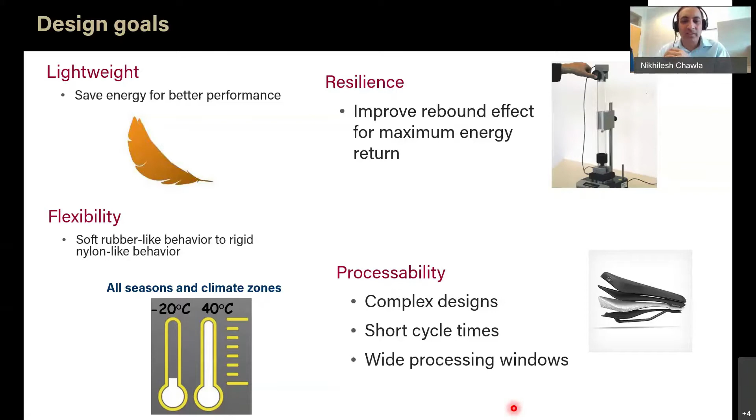And if you go to the websites of Adidas or Nike, you can now actually make your own shoes. You can design your own shoes, and you can get those hopefully in a matter of weeks. I have two boys who play soccer, I'm a soccer coach, and I know that having really funky looking nice cleats with their names and their uniform numbers on the shoes are the rage these days. So that's a big thing.

Let me talk a little bit about the history of high performance foams. This is a slide that's courtesy of Adidas. If you look back at the sort of really older Adidas shoes or even Nike shoes, they looked something like this - they were all nice and white with 3 stripes.

And nowadays you have a variety of different kinds of materials. You have the midsole compound, of course you have the rubber, and then you also have technology that goes into this - things like the miCoach.

This is a little chip that goes into your shoe sole, and if you're a soccer player, for example, it can keep track of how much you've run, your average, how you've struck the soccer ball, and things like that. So there's a lot of data that can be achieved from this.

One of the early sort of proponents for foams in materials is something called Adiprene. Essentially that was one of the early versions, and since then they have moved to something a lot better.

So here's actually a little video comparing the EVA, which was the classic sort of foam material, with the Boost foam, which is really the topic of today's presentation.

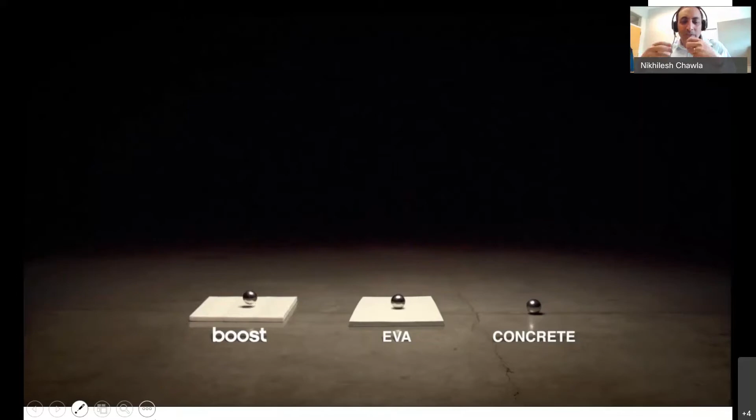We're going to show you a video of just dropping these steel balls on concrete and EVA and Boost. You can see that the ball bouncing on the Boost continues to bounce well after the other balls have stopped. So you can see that Boost in this very simple example gives you a very nice amount of flexibility and rebound to your foot, whether you're running a marathon or walking in your neighborhood. It's going to give you that comfort.

So what is Boost? Boost was actually introduced back, I think, in 2013 or so. It's really a composite, with tiny little holes - a hierarchical, porous foam structure. I'll show you exactly what that structure looks like.

So you have these little beads, and all of these beads are shown in a ball, but essentially these beads are used with a steam chest molding process, and you actually then form this sole of your shoe. It looks kind of cool as well - it looks like you have all these tiny little beads in there, but they're actually all fused together into the plate of this Boost foam.

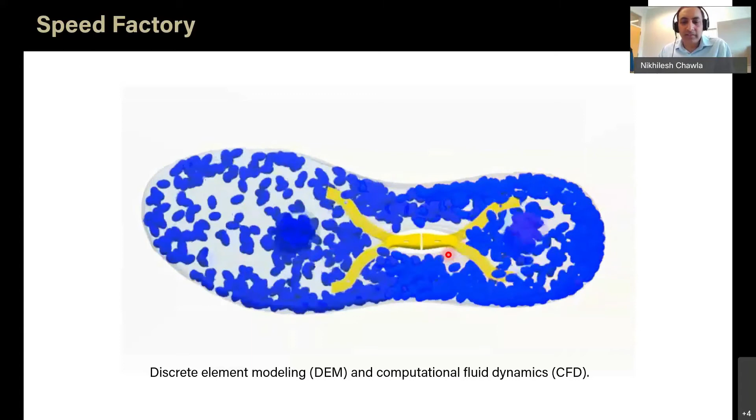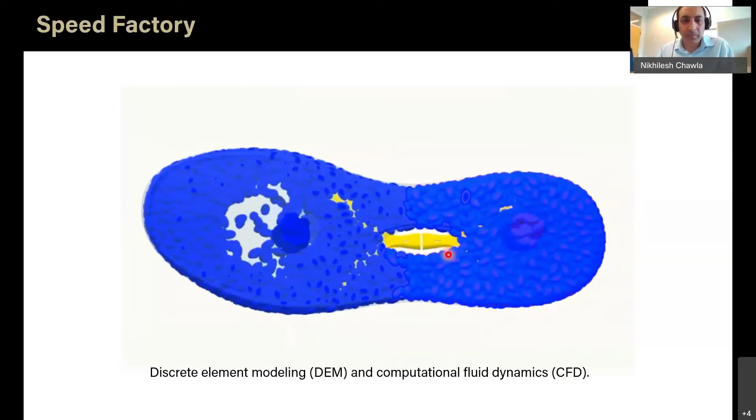This slide actually shows you a discrete element modeling, CFD kind of simulation, showing how these beads are actually flowed into the sole to make the footwear. Essentially they flow all the way through, and then eventually they apply some temperature and some steam, and you get the fusion between these beads.

So in reality, Boost foam is a very unique multi-scale hierarchical foam structure. It essentially has very nice attractive properties - energy absorption, high strength per unit weight. The length scale of this: on a macro scale you have all these beads together, and then we need to look at the individual beads and what the structure of those is. Then we can even go down to the ligament level and the cell level.

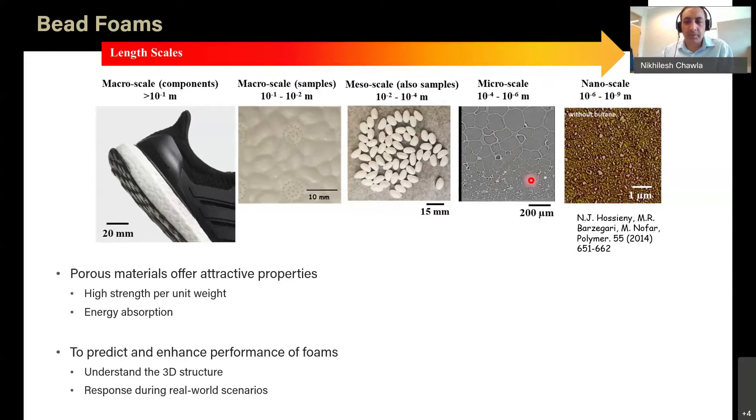Which I'm going to talk about today using techniques like X-ray microtomography. And if you wanted to go even further down to the nanoscale, you could get into the overall polymer chains and the chain structure of this particular polymer. So really the objective when we started this work was - Adidas had come to us and said, we have this really interesting material.

We really don't quite understand the microstructure property relationships in this foam. That was really the guiding force here: how does cell size and morphology affect flexibility and compressibility? How does cell distribution, ligament size, and all these structural effects, how does the 3D structure of the individual beads as well as the overall plate affect mechanical properties?

So we set out to do these in situ experiments to really look at how the overall cell structure is affecting the compressibility and the flexibility of the materials. This was actually done using X-ray microtomography under compression, and I will describe some of those experiments.

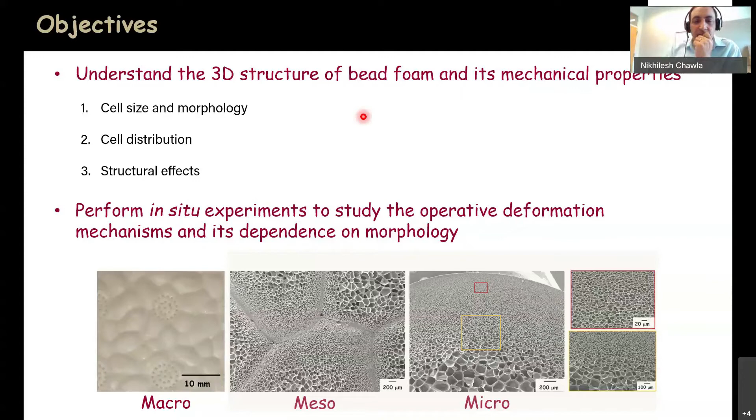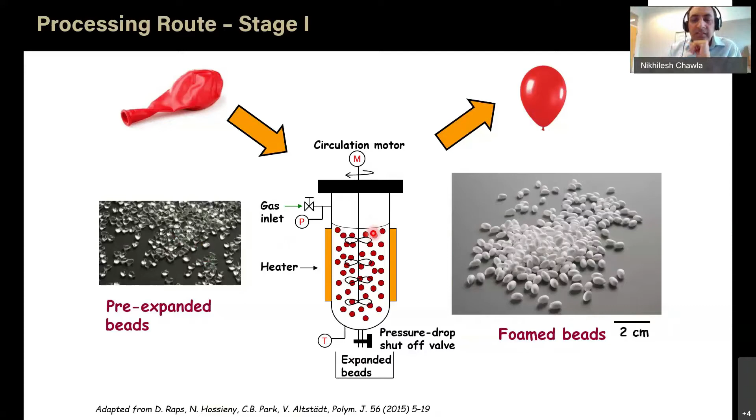So how are these beads made? We have these pre-expanded beads, and essentially these are put into a kind of autoclave, and then you inject this gas, and the pre-expanded beads get foamed. If you think about a balloon that initially has no air, you fill it up with air—so you foam these beads and get this cellular, porous structure.

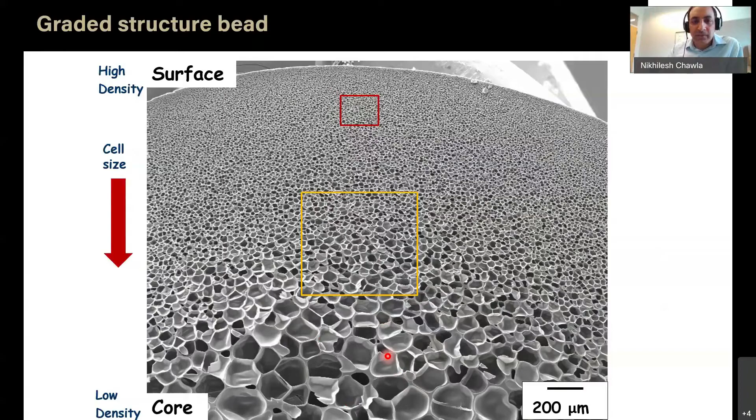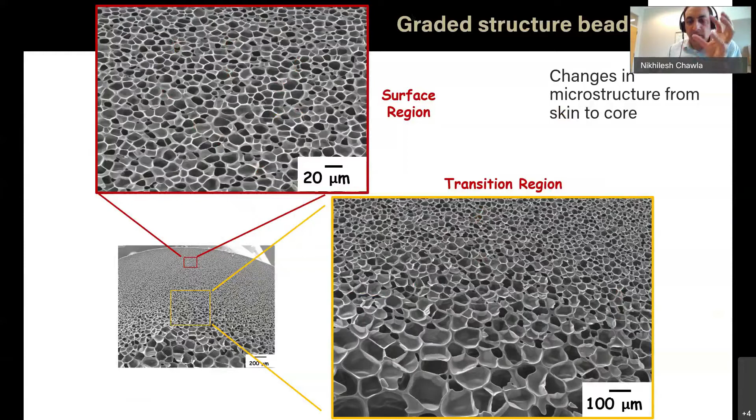So here, on the surface region, you have a much finer cell size distribution, and then a transition region, and in the center and core you can actually see much larger cell size. Okay, so now we can transition a little bit to the overall plate distribution.

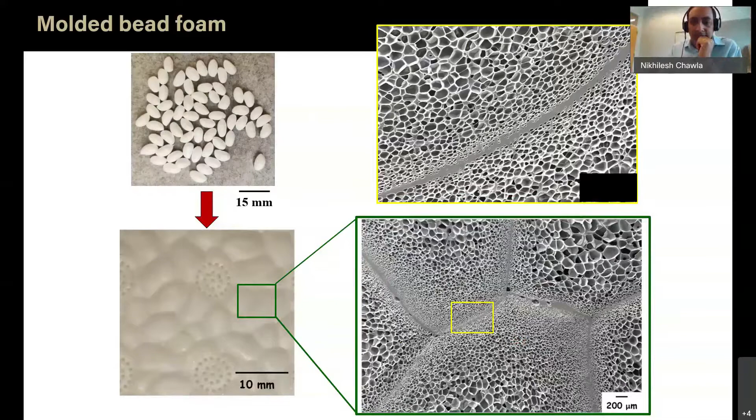So if we start to get these beads together and fuse them—I want to show you these images on a little bit larger scale. Here's a nice image of a cross section of the plate from the shoe beads that have been fused together.

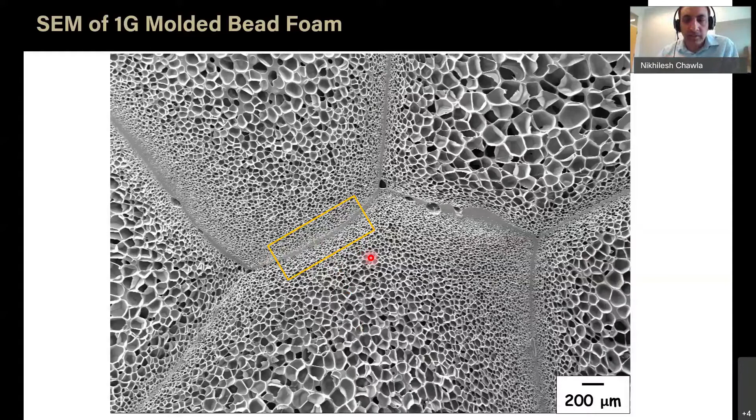And you see this darker gray region where you have very nice bonding, and in some regions a little bit of defects, but overall very nice bonding here. You can see that the graded structure gets, the cell size gets smaller and smaller as we get to the inter-particle or inter-bead boundaries. So you can start to see how the overall packing of the beads is going to affect the load transfer and how the material behaves under compression.

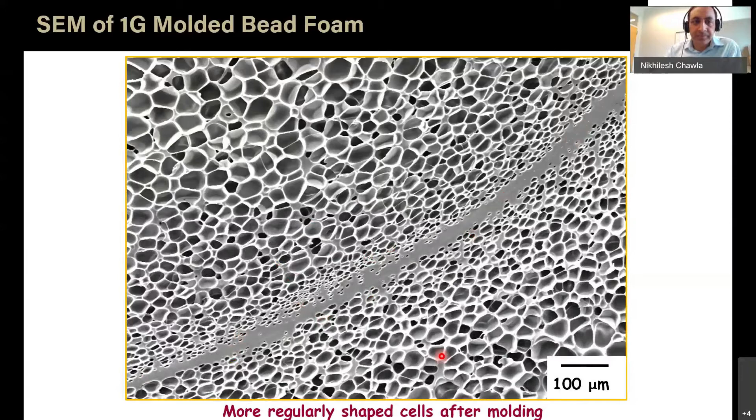Here's another example of that fused region. You have a very nice thin region, which is giving you the adhesion between the beads. In some situations, you do see some delaminated regions, and these, over time, are most likely going to initiate interfacial cracks.

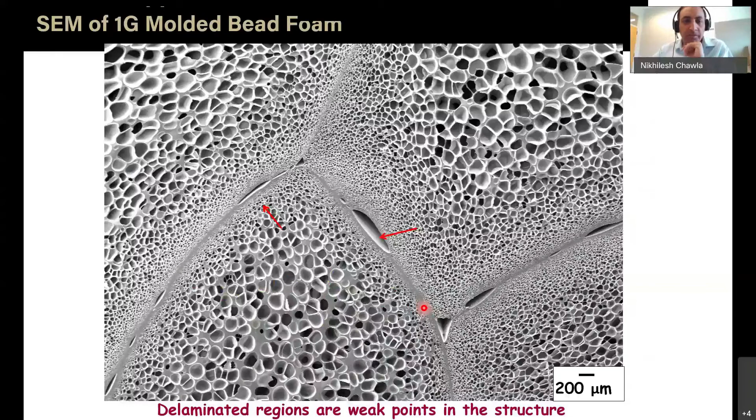So now the question is—what I showed you so far were all sort of cross-section SEM images, destructive images. We wanted to find a way where we could look at the microstructure of the material in 3 dimensions, non-destructively, and we also wanted to be able to apply a stimulus—in this case, the changes in the structure while the material is being compressed.

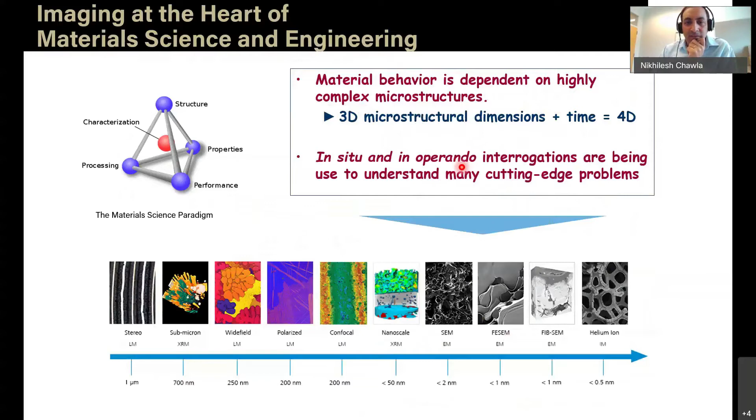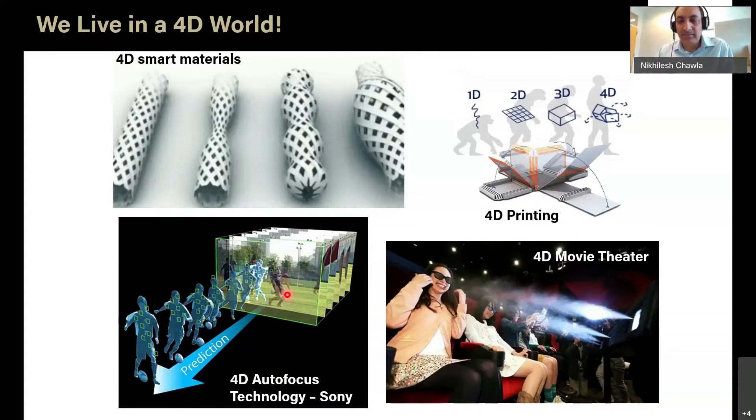I mentioned 4D here, and what it really means is we're looking at the 3D structure, and the 4th D is really time. 4D is not unique just to material science—there's 4D movie theaters, 4D printing, 4D smart materials, and even things like 4D autofocus technology. This is probably most analogous to what we're doing with tomography, because with autofocus, you're actually looking at time-evolved images, and in this case they're using focusing technology to predict what the object is going to do.

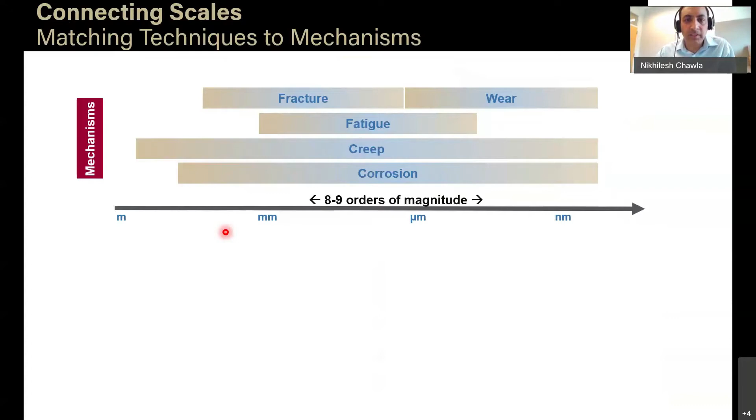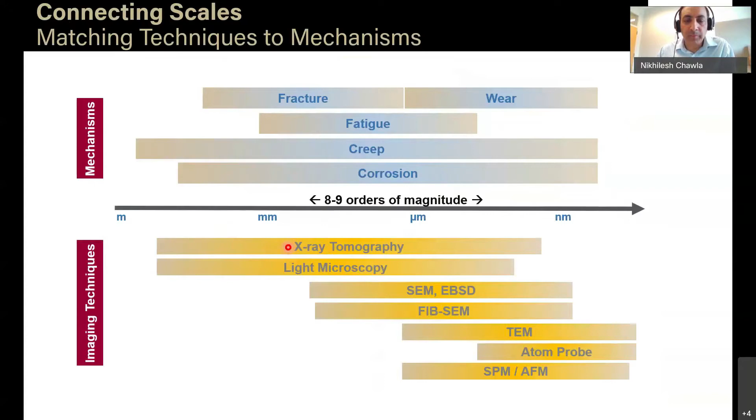So can we match length scales like fracture, fatigue, or creep? These things span multiple length scales, and we can start to link these particular properties to individual imaging techniques. We'll be looking primarily at X-ray microscopy and X-ray microtomography.

We can go all the way from the millimeter to submicron regime. I'll tell you a little about our center, which started at Arizona State University prior to my moving here to Purdue about a year ago. We had a kickoff meeting about 4 years ago, and these are our wonderful sponsors who fund our research.

Here at Purdue, we have X-ray microtomography capability where we can do imaging, and this is a cross-section of the boost foam. For metallic materials, which I'm not talking about today, we can do things like 3D crystallographic, 3D EBSD kind of measurements. We also have capability to do nano indentation all the way up to 800C and down to minus 120C, as well as things in the liquid cell.

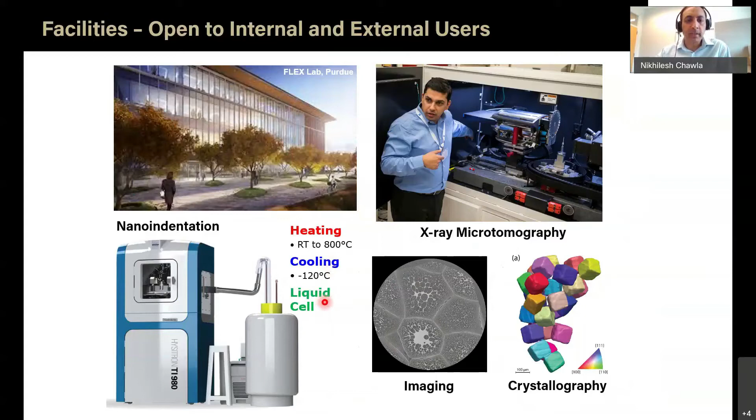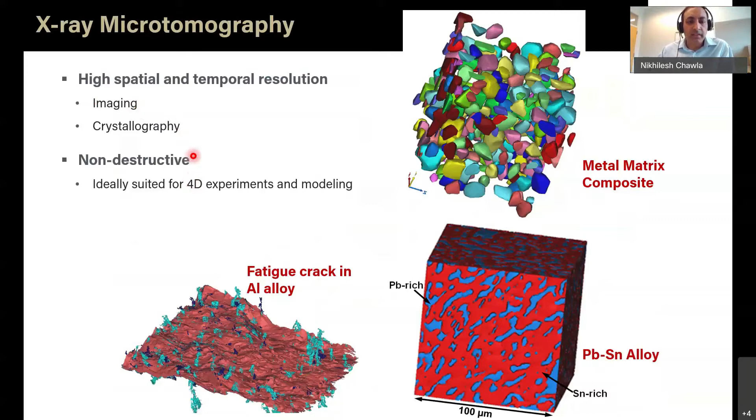Let's talk a little about X-ray microtomography. It's a technique that's been around for 10 or 20 years, primarily used for imaging. But as I mentioned, you can also use it to get 3D crystallographic information, and it's ideally suited, because it's non-destructive, to the kinds of 4D experiments that we wanted to do.

So if we want to do tomography, what does it mean? Let me put a little cartoon here. If we wanted to look at the 3D structure of a light bulb, we would shine some X-rays through that light bulb and get two-dimensional projections. Then we would turn that light bulb at angular increments of 1/8 of a degree or 1 degree, and essentially you'd get a two-dimensional projection at each step.

When you get all of those two-dimensional projections, you can use what's called a filtered back projection algorithm, which is essentially an inverse Fourier transform of that data, and you can get your 3D microstructure.

The data acquisition part and the reconstruction part of this are certainly important, but there are a lot of things we want to do with this data downstream, and that requires a fair amount of image analysis, image segmentation, visualization of these data sets, and statistical quantification to try to actually understand what the mechanisms of deformation are taking place.

That could be, in this case, changes in cell size, changes in ligament size, ligament diameter. In fracture cases, you would be looking at things like crack density and things of that sort.

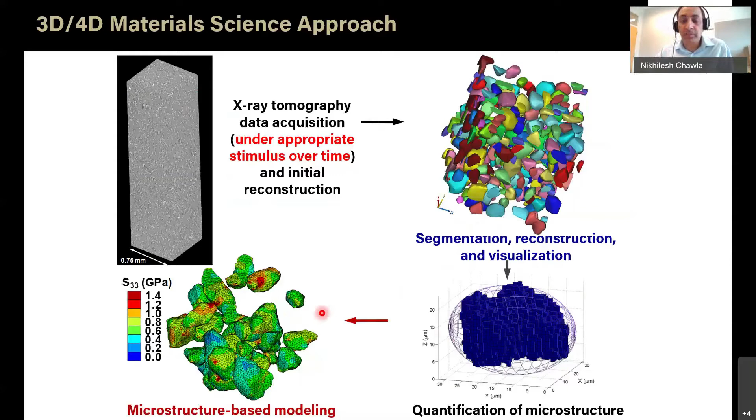The first part of my talk, I want to talk about some experiments we did on in situ compression in the lab—this is a lab scale X-ray source. In the second part, I'm going to talk to you about some experiments also in situ compression, but using a synchrotron source at the Argonne National Laboratory.

There are different reasons for doing the synchrotron experiments. Those experiments are more dynamic.

This is actually an image of the Versa 520. Here at Purdue, we have the Versa 620. You have the X-ray source here, and there are several filters, so it's a polychromatic beam with the X-rays coming in. Your sample is going to be sitting here, and it's going to be rotating, and we're taking projections at each of those angular increments. You can also get some magnification in this part here.

There's a scintillator screen that converts the X-rays to visible light, and then there's a CCD camera that captures the images. Of course this is done with the doors closed—we take safety very, very seriously.

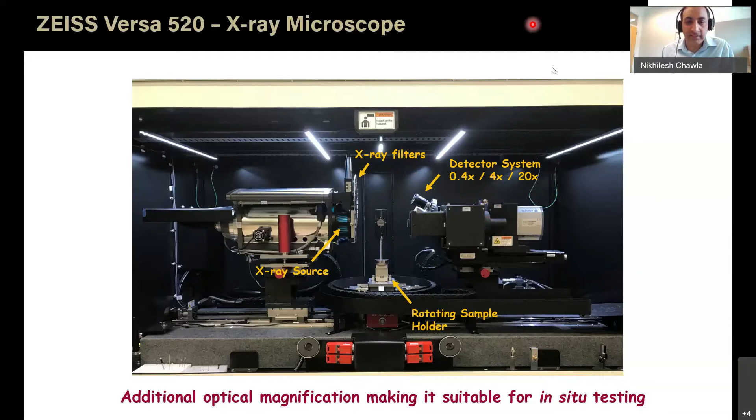So that's the X-ray part, but we need to be able to now compress the foam and be able to keep it at a particular strain.

So Arun actually devised this very neat little in situ loading fixture where your sample goes in here, and you have rotation of these screws that impart a downward displacement. You need to have this PMMA sleeve to give some robustness to the cell.

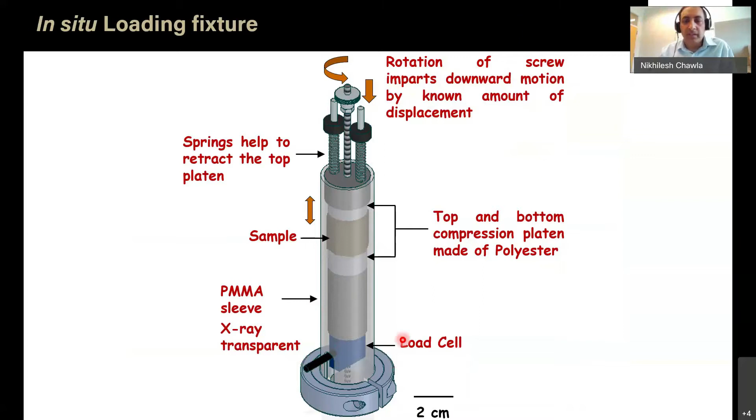That PMMA material is X-ray transparent, and you have a load cell down here. This whole thing is going to have to be able to rotate 180 or even 360 degrees during the X-ray tomography scan.

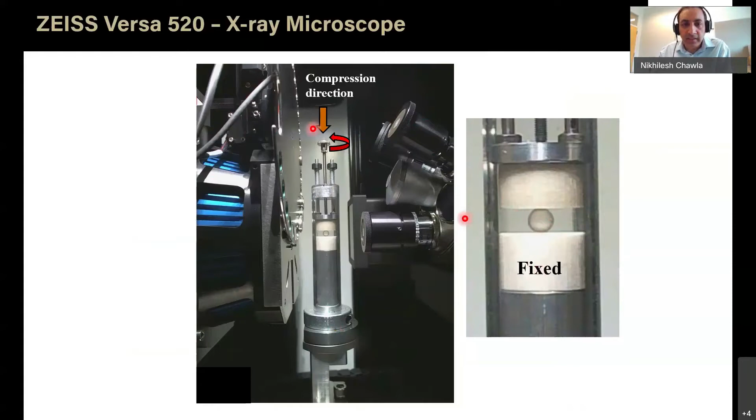This is actually an image of that. You can see this is one of the beads between two of the compression platens, and the compression direction is in this direction. One of the first things we wanted to look at is...

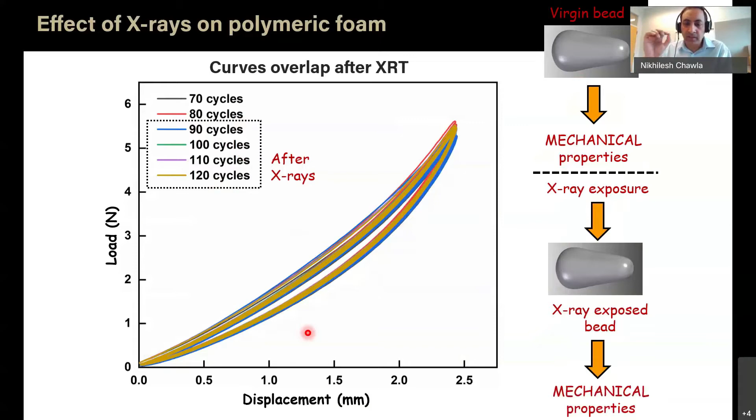Are the X-rays going to be affecting the mechanical properties of the foam? So we did multiple cycles and exposed these to the X-rays multiple times, and these are load versus displacement curves under compression. You can see that they stay pretty much the same. These initial experiments are on individual bulk beads.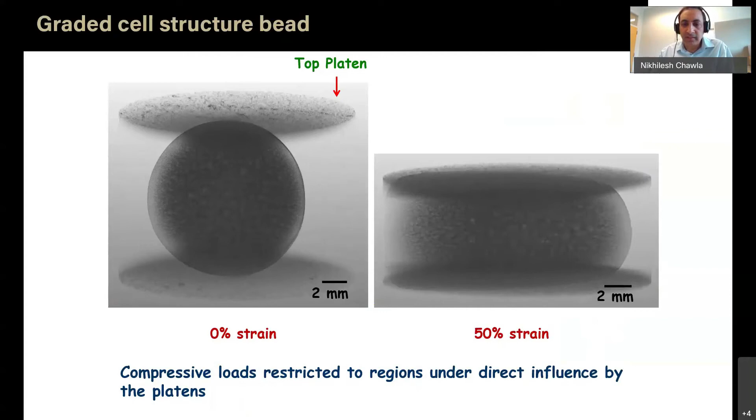I'm going to play you another video here after we squished that bead to about 50% strain, and then you can take an X-ray scan of that cellular structure.

Now you can start to study the overall structure. Remember that I mentioned these beads have a graded structure, denser on the outside and much coarser with thicker ligaments on the inside.

Here you can start to see that most of the action is taking place on the periphery of that bead, and most of the densification is happening there. There's very little strain, very little deformation going on in the interior of the bead - that's what we call region two. From the outside of the bead, you see most of the deformation.

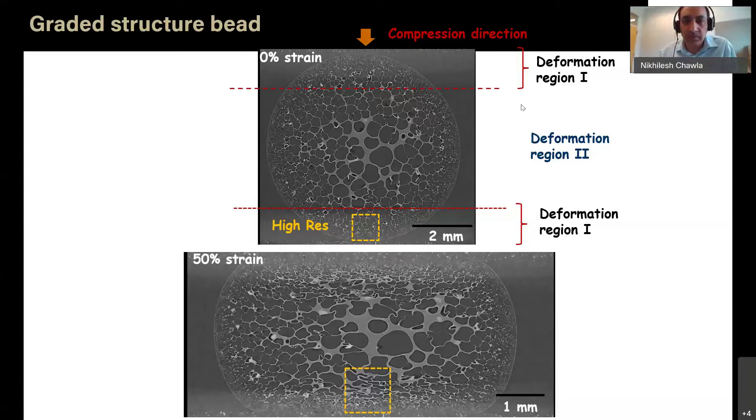I'm going to play you a little time-lapse video, and the percentage of compressive strain is on the top left-hand corner of the image. So here it is under compression, and you can start to see again most of the damage, most of the densification is taking place on the outside.

One of the other things you see is this very interesting kind of crinkling and ligament buckling in some of these. So we started to look at this in a little bit more detail.

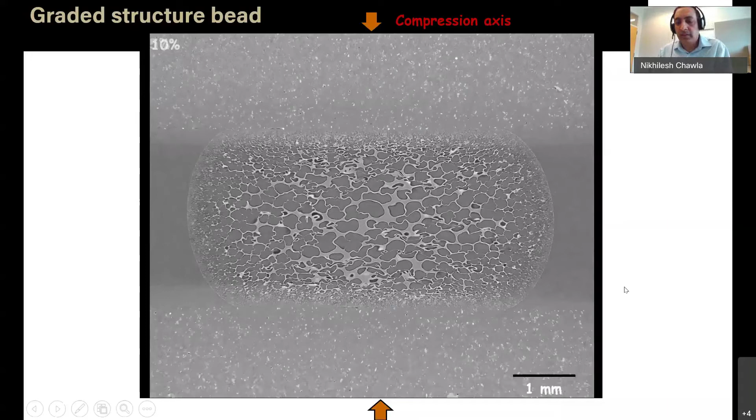Here's another example of how bead cell shape and orientation to the compression axis also plays a role - whether this is at an angle or if it's perfectly parallel.

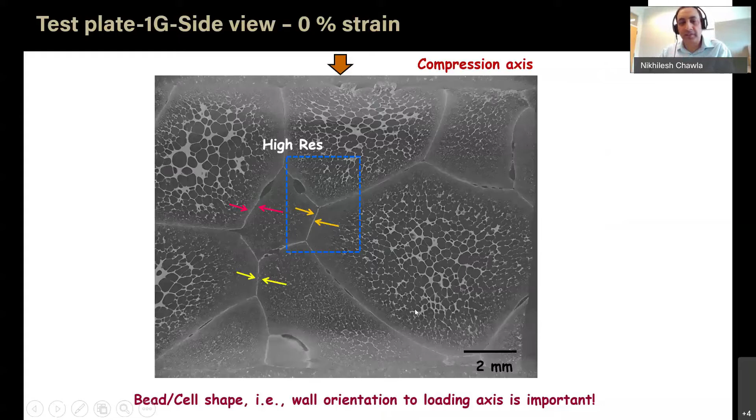Important, and before we could do any of the statistical quantification, we had to go through a lot of this image processing. We use these non-local means filters, and then we do a grayscale threshold.

I won't go through a lot of this, but essentially there's a lot of image analysis that goes into actually trying to make sure that you're capturing all the ligaments and that they're not joined through some kind of artifact of the imaging.

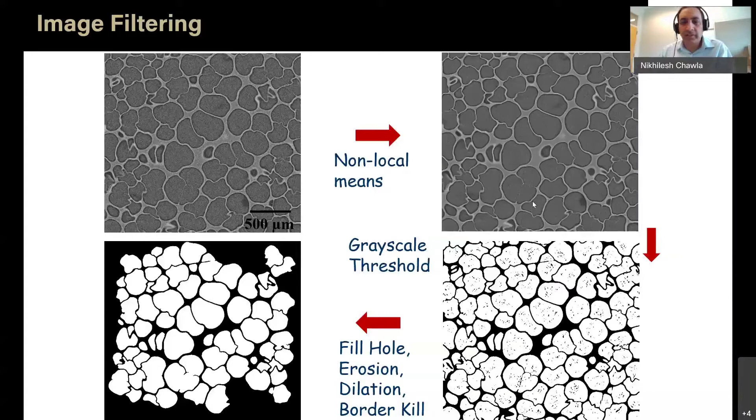Part of this is what's called a region grow algorithm. Essentially we're looking for pixels or voxels that are of similar grayscale value, and that will continue until it's almost like walking in a cave until you hit the cave wall - that's what we're looking for. So when we hit the cell wall, the grayscale changes, we stop the segmentation of the cell.

This is an example of that, and then what you're able to get is overall imaging of the individual cells in the foam. Here's each of those nicely colored cells - each is a different cell, and you can now start to look at them.

One of the really cool things is that these cells are not perfectly smooth. They almost look like we filled up a balloon and then took a little bit of air out, and each of these, if you think of them as a balloon, shrinks down. So we get these kinds of cells with a fair amount of curvature.

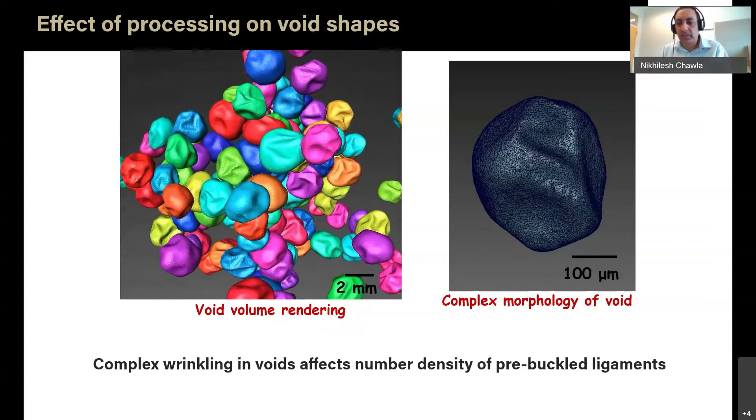This really has to do with the process by which the steam, the blowing process - once they foam the beads and essentially cool it down, there's going to be a contraction. Each of these individual cells is going to go through this slight crinkling process during the cooling part of the processing. That's what the void actually looks like.

Now with the 4D part, you can track individual beads to see what they look like as a function of strain. I'm going to pick three different cells here, shown with the blue, the red, and the yellow stars, and we're going to follow those individual beads as a function of strain.

Essentially what you see is that you have initially nicely shaped beads, and over time they start to crinkle down.

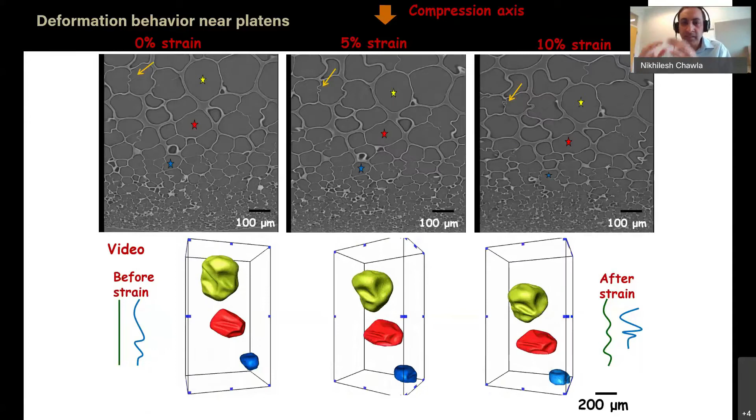The individual cell walls actually go through a very microscopic process of buckling. You start with almost these straight ligaments, and eventually they become snake-shaped, and they end up buckling in a very localized way. These are the kinds of things you can really capture using X-ray tomography.

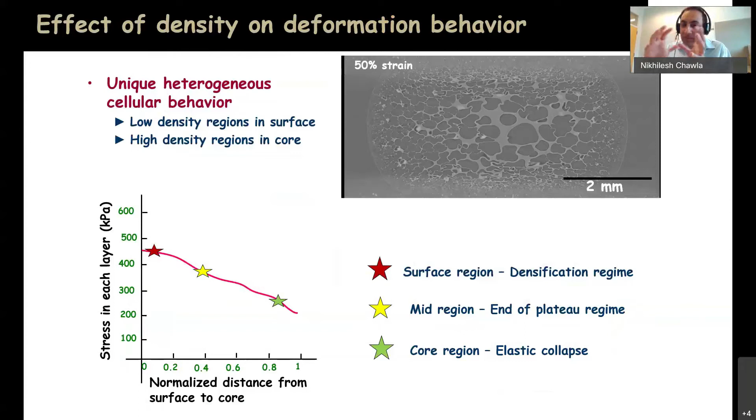Here you can start to see that the stresses close to the surface actually end up being higher and higher, because we're getting through the densification. The middle of the cell is actually still in the elastic regime. Now you start to see we're deciphering some of the secrets as to why Boost is such an amazing material, because really only the outside of the individual cells are deforming and densifying.

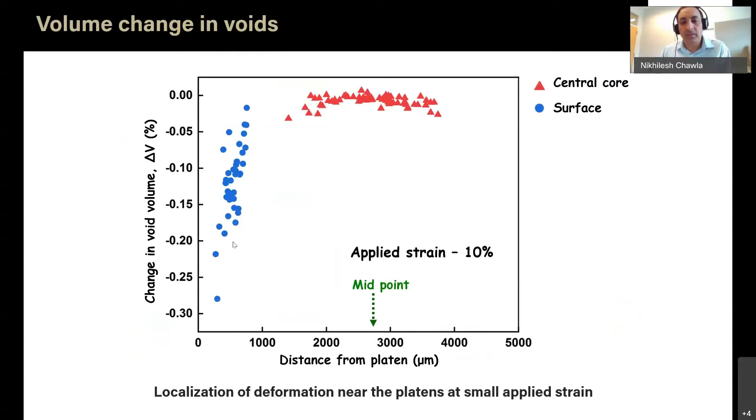This is actually change in volume, just to show you that quantitatively. This is the change in volume on the surface, in the blue. And in the central core, you can see that all of those cells are actually not changing in volume very much. Most of the action is taking place within 500 microns or so of the surface.

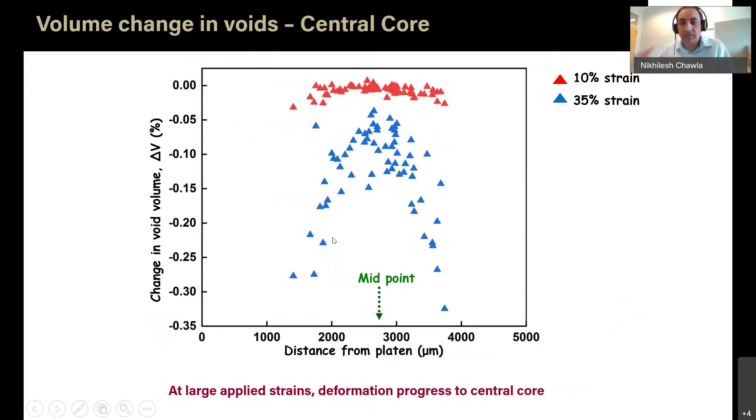This is as a function of strain. So as you start to compress and get more and more strain, centered on the beads, you now have a gradient in strain essentially, and it progresses towards the central core.

I showed you changes in volume of individual cells, and now we went through a process where we wanted to get localized strains. For this, we use digital volume correlation technique, which is very similar to digital image correlation, which is a 2D technique. DVC, or digital volume correlation, is a 3D technique.

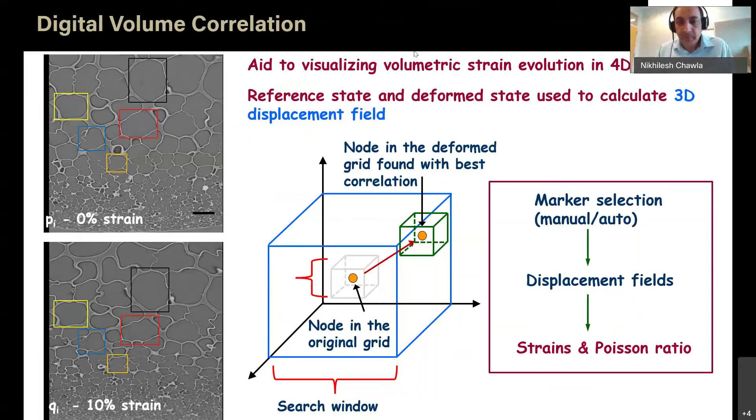Here we're going to be using these cells and cell walls and the centroids of the cells as markers, and using the displacements of those markers to get displacement fields. When we get displacement fields, we can calculate the strains. This is just a schematic of that.

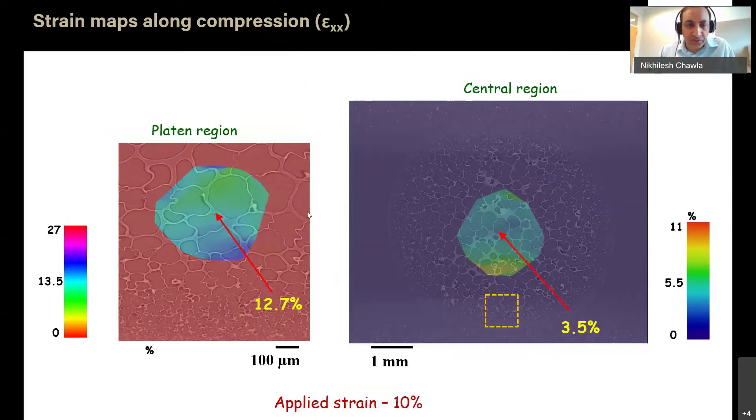Now you can start to see the overall local distribution of strain. This is at an applied strain of 10%. As you get to larger strains, you can see a lot more of the strain in some of the thinner ligaments. That's a precursor to that buckling phenomenon that I alluded to.

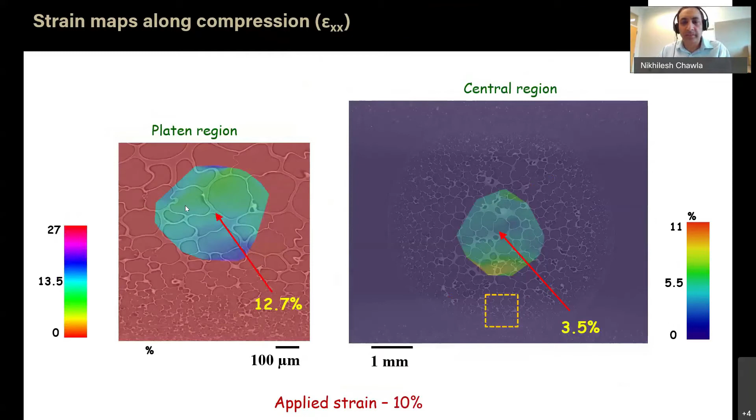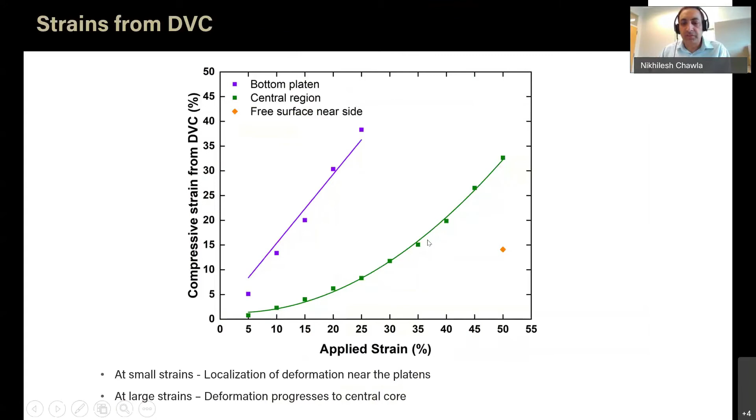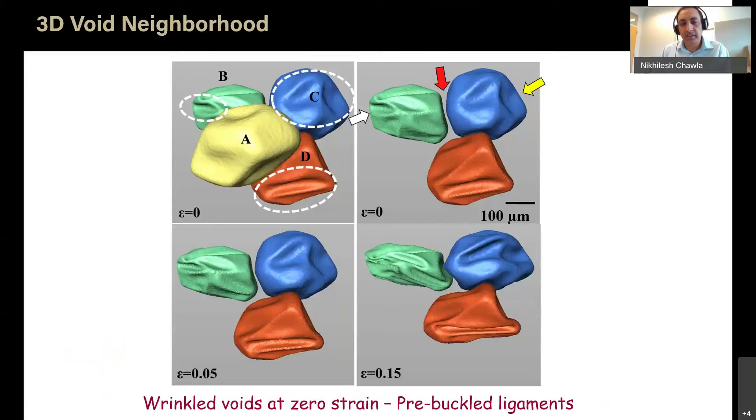I'll just show you another nice image of this compression and the effect of the wrinkling for each of these individual cells. And in the second part, I want to talk now about some of the experiments we did at the synchrotron facility.

There were a couple of reasons for doing this. One, we wanted to look at graded cells versus homogeneous foams, so beads with homogeneous structure, as opposed to the graded structure that I showed you with the Boost.

We were expecting that the homogeneous cells, which had a higher density, would also be stiffer. I'm going to show you that that was actually not the case, which is a very interesting finding—we actually had higher stiffness with the graded cells than with the homogeneous one. That, again, has to do with the graded structure.

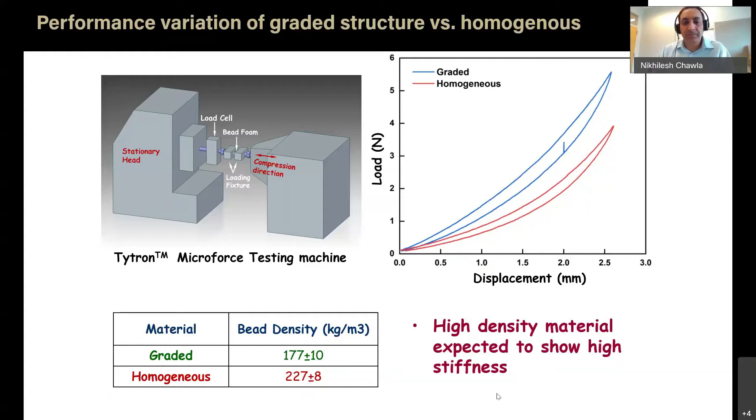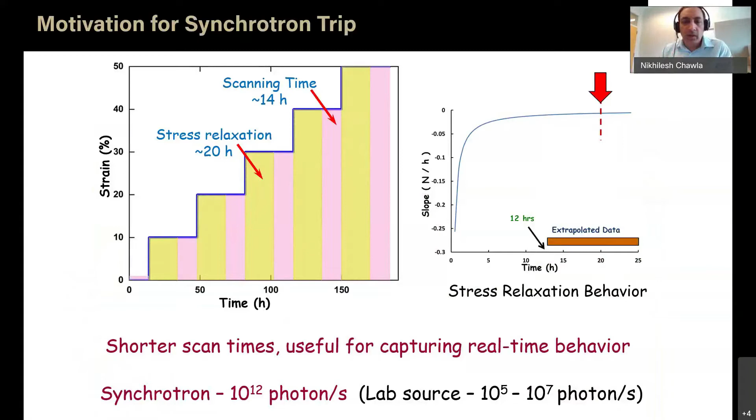So the point is that instead of waiting 20 hours for stress relaxation and another 10 hours of scanning time, you can now do these experiments on the fly in real time while the foam is being loaded, without having to pause the experiment.

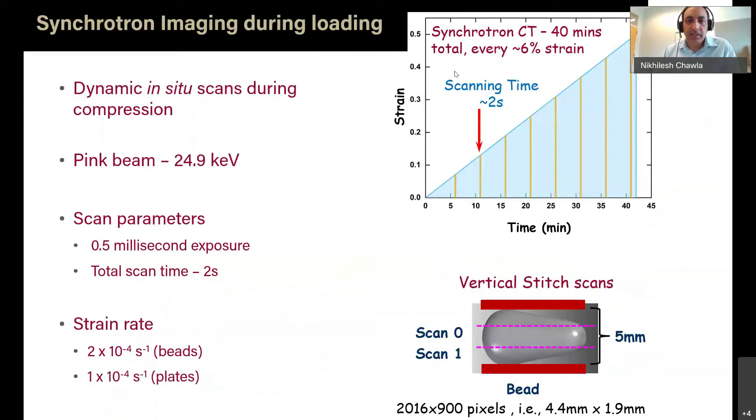So these were the experiments we did at the synchrotron. We're scanning 360 degrees in 2 seconds, with a 0.5 millisecond exposure, and you can actually do an entire compression experiment in about 40 minutes.

One of the keys with the synchrotron facility, and even the lab scale facility, is that this in situ compression jig has to weigh less than 2 kilograms. It has to be able to rotate 180, 360 degrees, and the X-rays have to pass through the sample and come out the other end without being obstructed.

So again, we use a Kapton tube. You have the compression platens here, this is the loading motor, and you have a bunch of these screws. For anybody who does mechanical testing, you know axial and concentric misalignment is very important. So we can actually use the images to see how much misalignment we have and correct for that, because we have three-dimensional imaging capability.

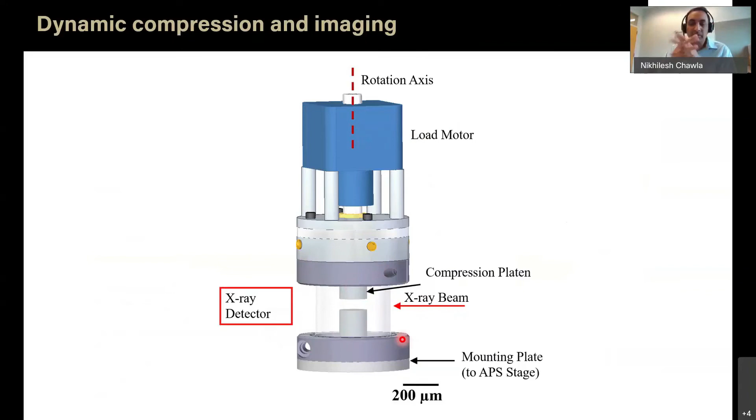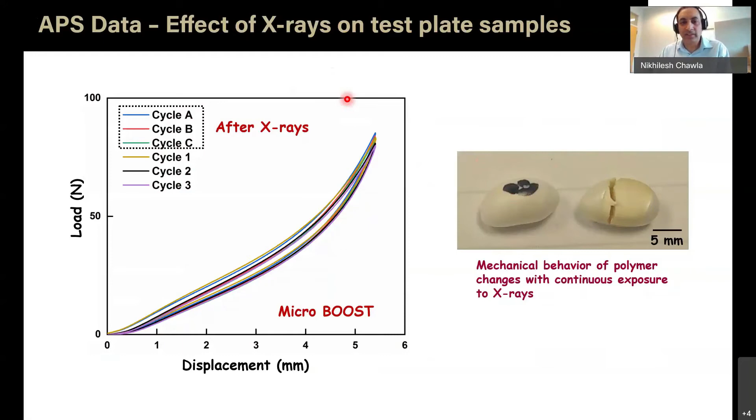When we fixed the shutter issue, we did the experiments again with low displacement to make sure the X-rays weren't causing damage, and things were fine. So that's what we call a heart attack moment.

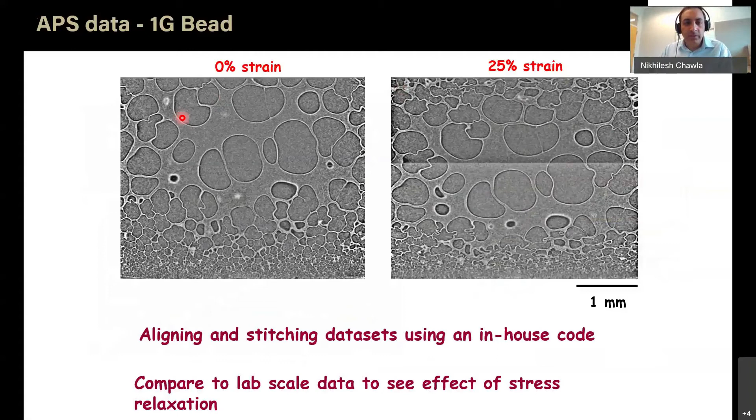So here are some of the data sets we got from stitching different volumes. You can imagine we're essentially scanning in a helical way, stitching the different volumes together to get the entire data set. One of the things you can do with this data—I'll skip through some of the imaging here—is calculate things like Poisson ratio.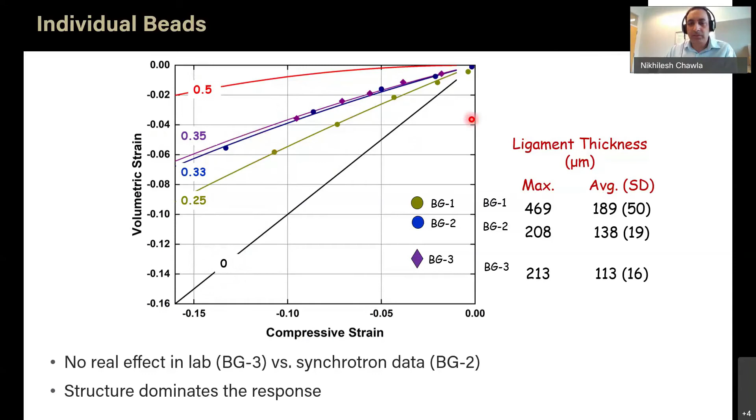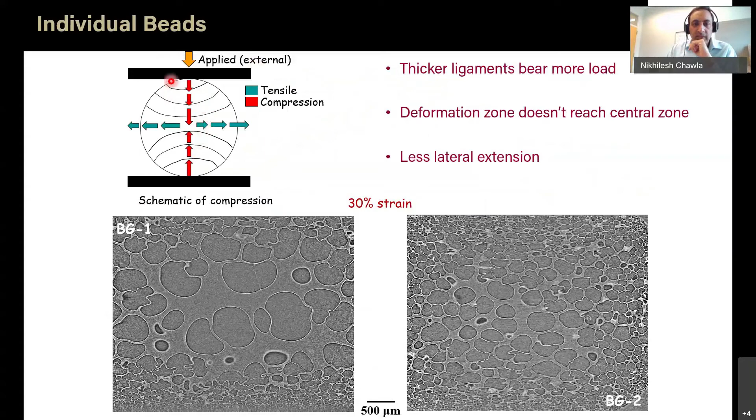We compared this to the lab scale data and found good agreement there, so that was good news. What's happening here is you have compressive stresses going on, and tensile stresses going sort of radially. The thicker ligaments are the ones bearing the load, and most of that deformation is taking place towards the outside, particularly in the graded bead—you can actually see that here.

One of the interesting findings, and I'll end with this, is that even though you have a lower density bead, the graded bead is stiffer for a given density compared to the homogeneous bead. The reason is that the outside of that bead is actually taking up most of the load, giving a densification.

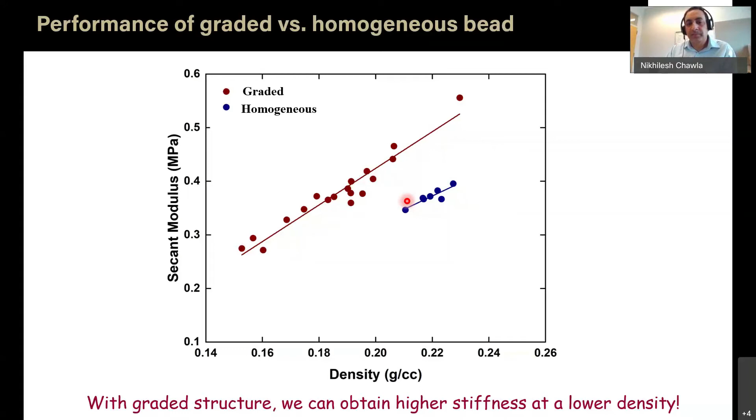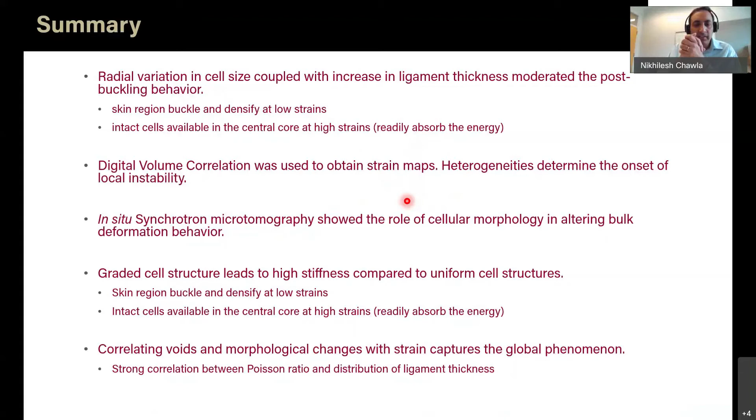And locally giving you a stiffer response. So I'll go through this quickly. Again, we looked at localized microstructural impacts on compression, using digital volume correlation to get local strain maps and how heterogeneities were affecting the onset of these local buckling events. Then in the last part, I talked more about the synchrotron experiments, the dynamic experiments, where we could measure things like Poisson ratio and link those to the microstructure.

So I'll end there, and I would like to thank again Arun Sundar, the PhD student who did all of this work, who's currently at Thermo Fisher. He recently graduated.

Collaborators at Adidas - Yasmin Max and Chris Holmes are in Germany, and Mark Henderson is here in Portland. I should mention one of the perks of working on this project is that we got some discounts and some free footwear of Adidas Boost foam.

Yeah, no, looks great from my end. So I'm going to let Danielle take it away, though. Yeah, thank you, Professor.

I really appreciate you taking the time out of your schedule to give us your talk. I definitely learned something new, and now I think I'm going to have to go buy myself a new pair of Adidas running shoes to replace the other brand ones that I have, because I don't think they have the Boost foam on them. Actually, no, I know they don't, because they're not Adidas. So I've got to get myself a new pair of running shoes.